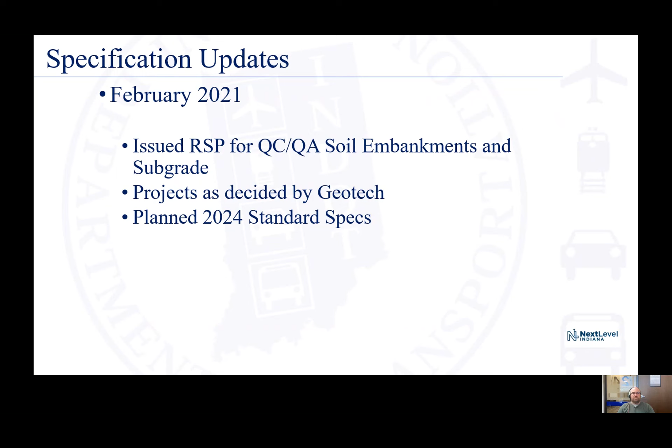In February, this might not be of big interest to a lot of folks watching, but we now have what we call a recurring special provision rather than a unique special provision for our QC/QA soils. That's something we've been working on with our geotech division for the past 10 or 12 years. It's gone very well, and we are rolling that more into our standard specifications.

There's one additional fairly minor update related to slag materials and B-Borrow. B-Borrow made a change to not allow the use of those slag materials if it's being used within 2 feet of the free water level, due to concerns with leaching.

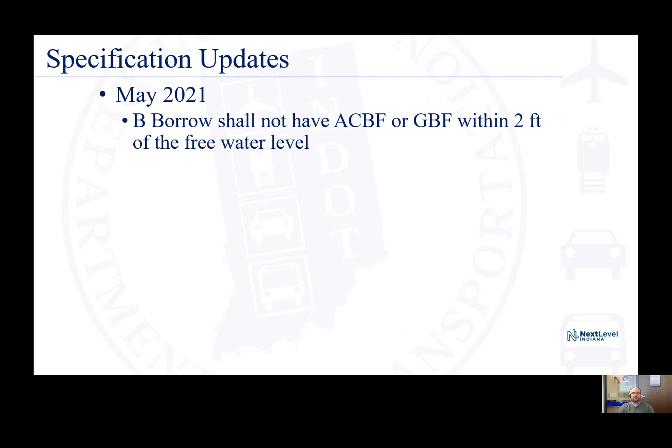So those were a few, I'd say, fairly minor changes that were made. But one of the biggest things that happened aggregate-spec-related over the past year was actually a change that happened and then unhappened. That's related to the tarantula curve.

If you've seen me talk over the past couple of years, you've probably heard me talk about optimized concrete aggregate, aka the tarantula curve. For those who don't know, it's called tarantula because the graph looks like a spider.

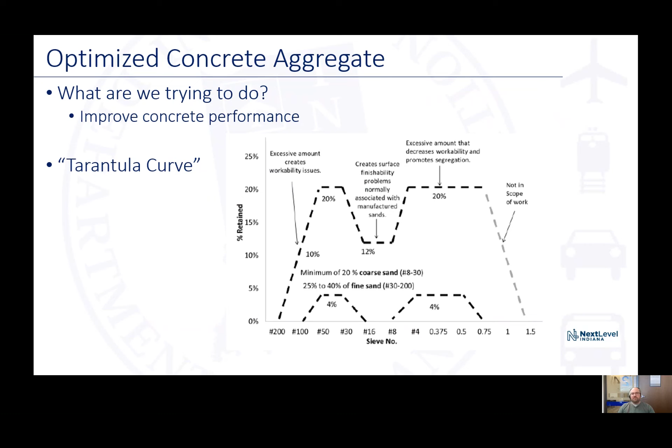The key to notice here: the idea is you have a concrete gradation for a proposed mix, and you plot it within this curve. If it's within the curve, it's considered optimized. The key to note, though, is it's in percent retained, on each individual sieve. So there's a couple differences we have to wrap our heads around—we're used to looking at percent passing or cumulative percent passing. So when we're talking about tarantula, we're talking about percent retained.

INDOT has been talking about this with industry for at least the last 6 or 7 years, and probably the last 4 or 5 fairly seriously, on how to get this optimized. The concept is very similar to what's been done in asphalt for many years with the concept of VMA—it's all about packing aggregates.

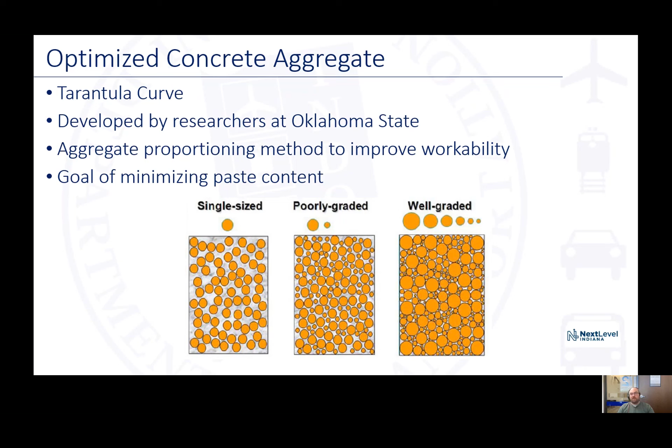You can see here on the screen, if you have single-size, poorly graded versus well-graded aggregate, the idea is to minimize the space between those orange aggregates. With a single-size aggregate, you have a lot of space in between that requires more paste, more cement in the case of concrete. There are ways to improve that packing by looking at the gradation, and it has a lot of benefits—not just reducing paste content, but also improving workability and durability.

This is a real-world example, a core taken from one of our interstates that was not optimized. You can see on the screen where that particular mix came out on the tarantula curve—it was not optimized. The intermediate size had too much percent retained, and that's actually what happened. This wasn't the only core this happened to. The surface didn't close behind the paver, poor consolidation led to segregation, and now we're left with material that has voids going down throughout the pavement due to workability—it's going to end up being a long-term durability issue.

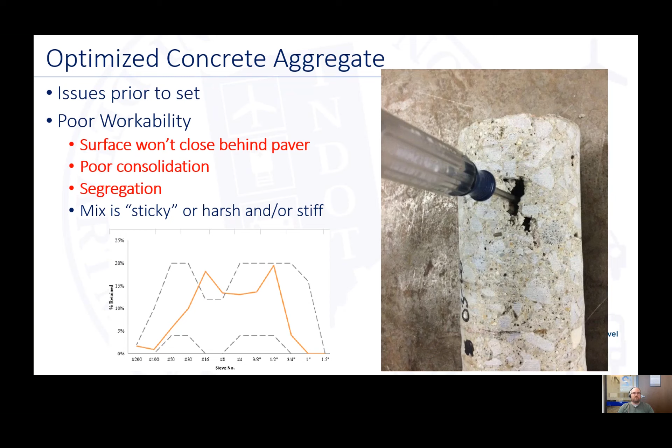So all that being said, there are benefits to optimization—it can avoid situations like on the last screen, among others. It hasn't been as simple as just flipping a switch and changing the spec, though. In conjunction with the aggregate industry, working with IMAA and the concrete industries, a lot of discussion ensued as to the best way to implement this.

Would we change the aggregate gradations that are in the spec, or change the requirements for a concrete plant to meet? We ultimately came to a kind of middle ground proposal that would allow aggregate producers to submit a gradation for approval that could be used in concrete.

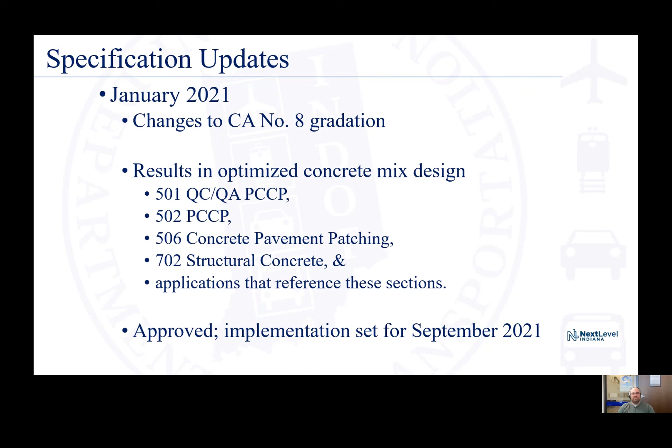So in January '21, we made a change to the spec to require optimized concrete mix design in all concrete applications, referenced in 501, 502, 506, 702, and anything else that cites those. It was intended to be implemented September of '21. You've heard me talking a lot about 'supposed to' and 'intended to,' and probably giving away the answer here, but the short answer is it didn't happen as planned.

So what happened? Along the way, there was a lot of discussion over whether we need a different gradation of eights for our coarse aggregate in concrete. Is this going to be for all concrete? Is it going to apply to non-INDOT concrete? A lot of the concrete industry folks indicated they would prefer to use one coarse aggregate for all their work, whether it's INDOT, private, or commercial, and that was one of the goals.

Over the course of spring and summer 2021, the concrete industry said, on second thought, we're still going to ask producers to make standard eights for our private work. That potentially ended up with situations of having multiple piles of aggregate, which was not ideal. There was also a cost increase we knew about, a potential cost increase to the optimized aggregate being proposed.

One of the other deal breakers was pumping. One of the ways we opened up the procedure to allow more optimized aggregate was a larger than 1 inch top size, which eights did not allow before. So when some of those gradations were submitted, there was quite a bit of plus-1-inch material included, and the pumping contractors said, wait a minute, this is really going to decrease the efficiency of their pumping operation. With all that being said, we felt the best thing to do was roll it back.

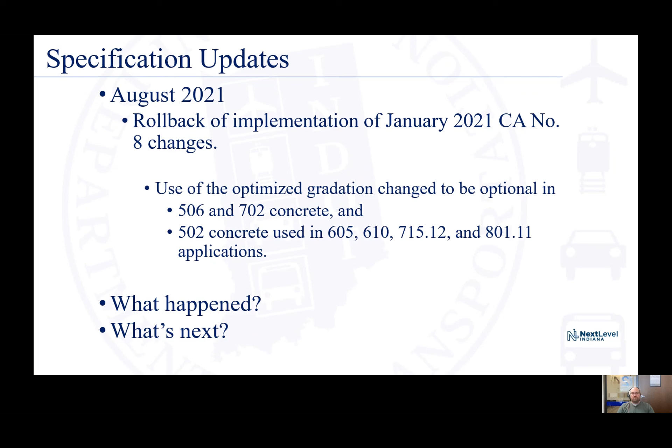So now it's optional to use an optimized gradation per the tarantula curve in 506, 702 — essentially a lot of things produced by a ready mix plant, miscellaneous concrete, structural concrete, etc. It's also optional for 502. It's still required for 501 mainline concrete paving. Honestly, a lot of those contractors have already taken advantage of using an optimized gradation anyway, and they're okay with the larger top size material. So right now it's optional, and that's what we're going to move forward with.

The change we made was actually in ITM 226, which I haven't talked about yet, but that's defined by the new spec, and it's where the coarse aggregate requirements for concrete are now included. As I mentioned, 501 still requires an optimized gradation, and for the other specs you could choose to be optimized voluntarily, or use the standard INDOT 8, or we added an option here for AASHTO or ASTM number 57.

Many years ago — it's interesting to go back into history — we allowed AASHTO 57s in the spec up until sometime in the late '70s or early '80s. We went to the 8, my understanding, to combat cracking at the time. But some of those gradations, 8s and 57s, have a bit of crossover there. This might be beneficial to those of you near our border states who may have had to maintain two different gradations. We're now allowing this as an option.

Moving forward with Tarantula, we're still interested in getting it into the spec as much as we can. Right now, we're going to learn by seeing how many concrete mixes come in using it voluntarily, whether through a different coarse aggregate gradation or blended with an intermediate aggregate like pea gravel. So this year, 2022, we're going to monitor and reset in the fall moving forward, and see what we can do to continue and get as many mixes as we can optimized in Indiana.

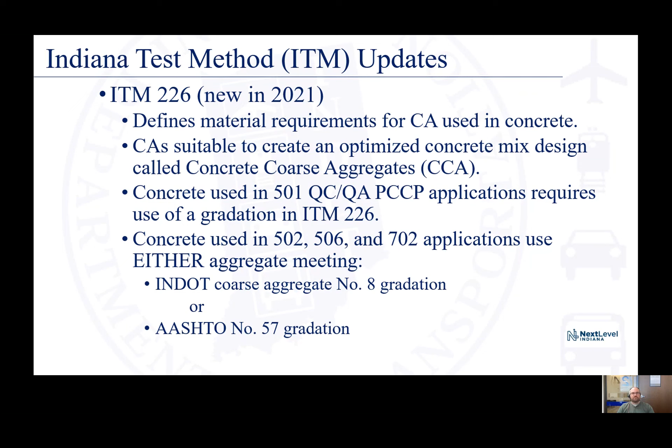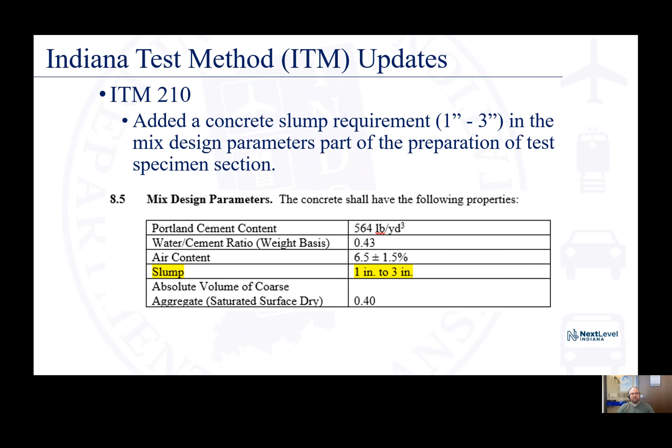ITM 211, the CAPP program, inactive status - we added some clarification and clarified some language. Previously, a producer had to request inactive status. We added a statement that if for 3 years a producer has not produced or shipped any material, the Division of Materials and Tests may notify and place the source in inactive status.

This is just to get some of these cleaned up that haven't shipped anything for years and move them to inactive. Of course, they can always request to go back active if they start producing again.

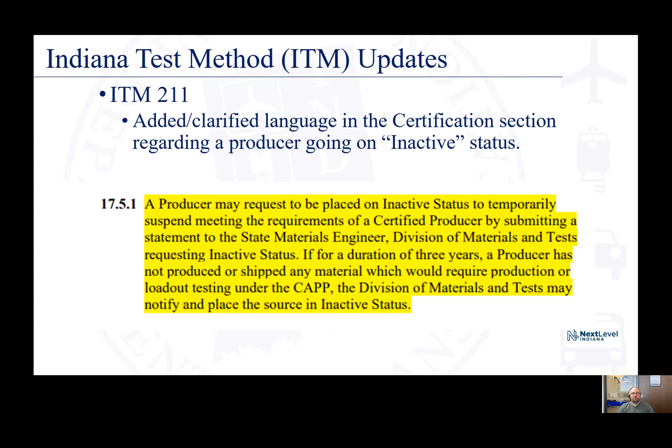All right, ITM 224, which is flakiness index. We did add a couple of things. Another sieve was added that was not referenced - it was referenced in the ASTM E11. It's different than the number 4 sieve - they're very similar, but different. So we added that. And probably the bigger change is having 2 specimens rather than 1.

The concern was we had to do a gradation, run the test, and then do another gradation - and if we have an aggregate that's prone to degradation, that could skew the results. So the idea is we reduce 2 samples, do a gradation on one of them, and on the second one, don't do the gradation first - run the test, then do the gradation. It's intended so each one only has the gradation done once rather than twice. We also added some revisions to the worksheet for clarity.

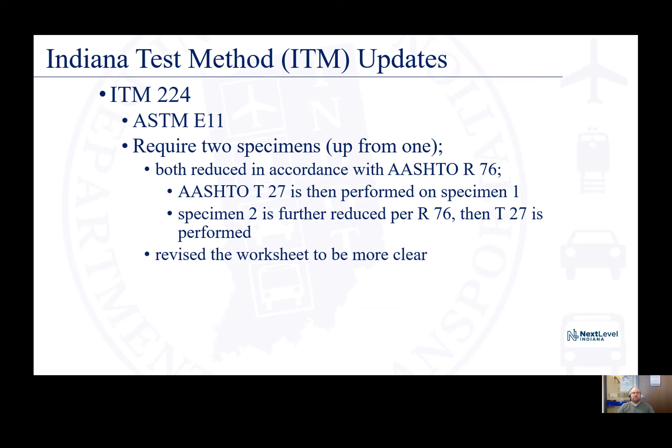ITM 902 - this is one of those examples I like to tell people, if you see something that looks confusing or not right, please let us know. We try our best to review everything we put out, but we don't always catch everything. Sometimes an edit makes sense to us but doesn't make sense to someone who wasn't in the room when we discussed it. This is one of those cases. A couple of years ago, we made some edits to the appendix in ITM 902.

ITM 902 is verifying sieves, and we updated the workbook. It was pointed out to us last fall that there was some confusion - we had 2 different things labeled X and Y. Where you now see 1s and 2s, we had those as X's and Y's, and we also need to make the measurement X and Y of each sieve opening.

So we changed that - now we have field 1, which is sieve openings 1, 2, 3, 4, 5, and field 2, which is 5 additional sieve openings going the other way. Each one of those has an X and Y dimension, and that's what we really want to measure, which needs to get recorded in that table.

We added some more clarity in the language there - we need to average the X, average the Y, and added some language pulled down from the actual ITM about whether the sieve will pass or fail. So really all just for clarity, but it was a user who noticed this and said, hey, this doesn't make sense to me - and they were right.

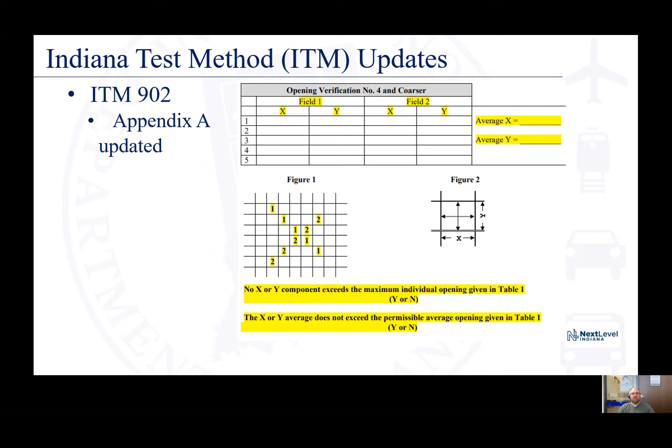Okay, some additional future topics. One of them is modified coarse aggregate number 53, and this was a submission that came in from the IMAA a couple of years ago now. I have to admit this one got eaten by COVID just a bit.

I'm sure a lot of things that got sent around the beginning of everything that's happened the past couple of years kind of went by the wayside, and I had to get caught back up on it. So a couple of years ago, IMAA submitted the idea to split the current gradation into two. This is the current gradation for our number 53s.

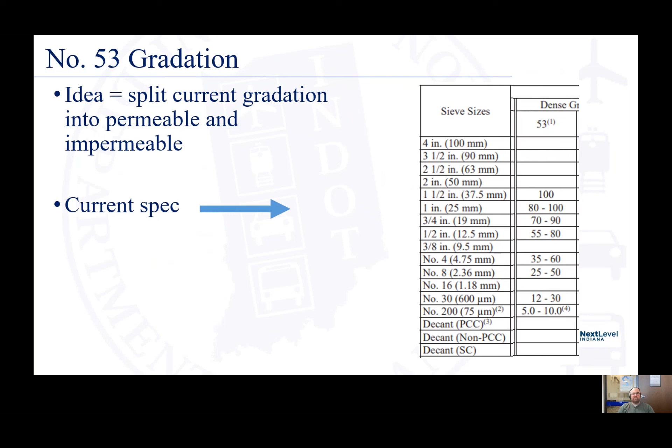You can see there on the right of your screen, straight from the spec book. What was submitted as an idea was this type 1 and type 2, so two different issues. I'm glad when folks bring things up that I wasn't aware of. A lot of producers, especially stone producers making 53s, have to blend some cleaner material, natural sand or whatever, to meet the 5 to 10 gradation requirement on the number 200 sieve. That's part one. Part two, separately, I was in a discussion with some prime contractors talking about 53's compaction, and they said it would be a lot easier to get the compaction if we had just a little more fines, a little higher than that 10%. And it's like, well, hey, when a good idea comes together.

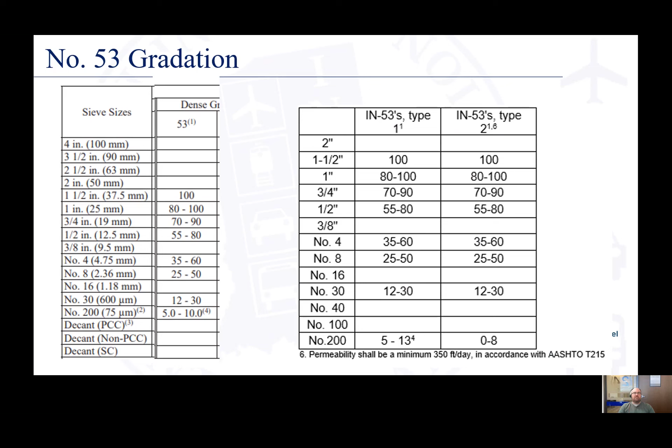So we took a little time, our geotech and pavement group reviewed it, and don't really see any issues with having the slightly higher fines of the proposal, 5 to 13%. So on paper we're looking at moving forward. The other type, 53's type 2, is proposed for drainage type material. So having two - one for impermeables, kind of when stability is needed, and one for having a drainage layer. Right now what we're looking at is better defined material usage, easier to produce, and better constructability in the field.

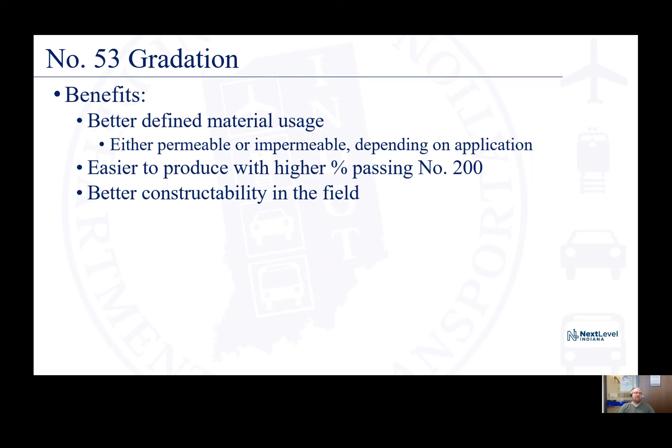I got ahead of myself there from that slide, but what do we do now? We've confirmed it's valid on paper, and we're looking for some volunteers to pilot it. We already have one volunteer, and we're going to work with them coming soon to place some of this on a job. That's really what we're looking for this upcoming year - some folks that would like to produce that gradation with slightly higher fines, coordinate with an existing project, and really just see if there's anything we've missed in the field. As of right now, it looks like it's probably a win-win for everybody. If everything goes well, with a couple of pilots that we're able to try, I could see moving fairly quickly getting these changes into the standard specs.

It was pointed out to me at one of the meetings, in person after the meeting, that what's old is new again - apparently the gradation that's been proposed is something very similar to the gradation we used to use back in the 70s, or maybe even the 80s. So sometimes things come around, good ideas come back around again.

All right, PRA materials, where are we? You may have heard me talk recently on PRA, our polish resistant aggregate program. Our current process right now has two parts. Part one is validation on the British polishing machine, which can be time consuming. Then the real time consuming and expensive part is a test strip. So that's how it is now. To get a PRA material approved is at least 2 years, usually about 3 by the time everything is said and done, and it's based on one project.

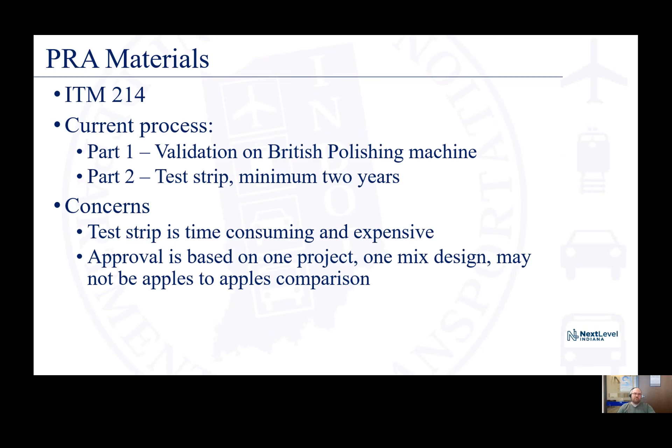From INDOT's perspective, it's a snapshot in time on one project, and it needs to beat an existing PRA that may not always be the best measure of the aggregate's performance for polish resistance. So a couple of concerns about that. I've asked the question, can we use what's used in our ITM 221 approval process, which is the dynamic friction tester you see there. ITM 221 was developed about 8 or 10 years ago now through a research project to approve high friction aggregates, equivalent to steel slag essentially. We have a few of those around the state, but that's not what we're trying to do here. We're trying to take the same concept used in that approval process.

Using this dynamic friction tester and use that to approve polish resistant aggregate. What you see here is called a 3-wheel polishing machine. On the left, we make up some asphalt samples, put them on a mold, and use plaster of Paris to level it out so we can measure. What you see on the right is a diagram of the 3-wheel polishing machine. The wheels go around and around 300,000 times, polishing a track in there, and afterwards you can see it.

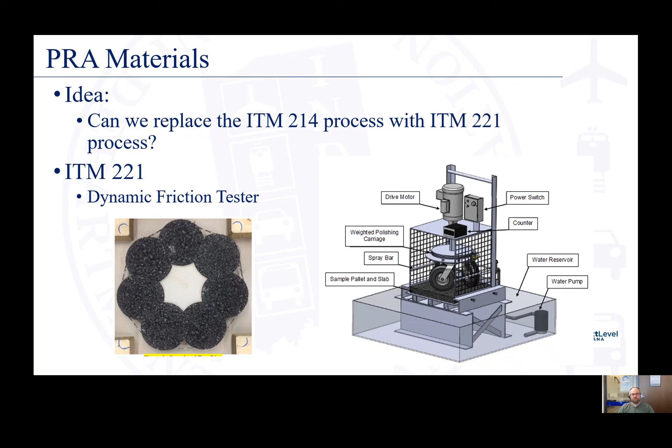So what are the issues? We think this can tell us some good things about friction resistance, but what's our confidence? Can the test discern between good and poor aggregates? When we did this initially and did a lot of the research using this equipment, we typically only tested aggregates that we think are going to perform well. So we need to test some that we think are going to perform poorly to make sure it can really differentiate between those. What mix design should be used?

Currently, a cookbook mix design is being used, and then who's going to make and test the samples. Currently, the equipment here in Indiana is operated by the North Central Superpave Center and IESA.

INDOT Materials and Tests is looking into getting some of the equipment. We don't have it yet, but as of right now, there is a fee that has to be paid to IESA every time the testing is done. So if Materials and Tests gets the equipment, then we could do that in-house without any additional fee. That's something we're looking at doing, but procurement right now, what you're seeing there on the screen is made in Japan and has to be sourced from Japan. It's been fairly difficult, to say the least, I think, to get some of that stuff right now.

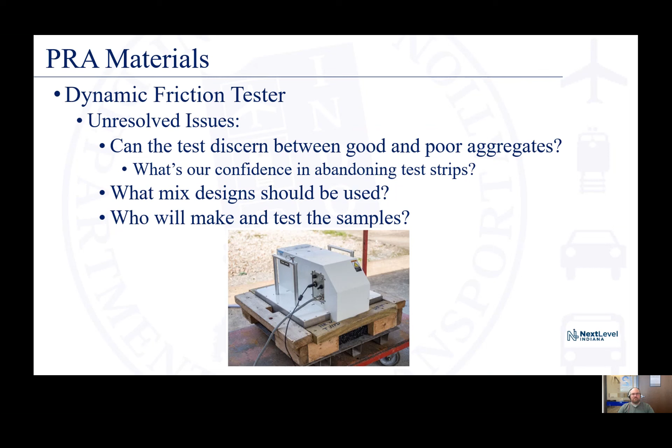One additional thing we're reviewing with ITM 210, especially with some of the changes I believe to the 53s I was just showing you. When we're doing AP testing, we're going to sample whatever specific gradation, product I should say, that you're wanting to get approved for AP. But when we actually make the beams, we have a standard gradation. So for those who don't know, it is a specified gradation that's in ITM 210 that's unrelated to the gradation of the product you're making.

The issue with that is we're having a hard time with the number of bags we normally get, having enough material, so we're having to get more bags. We're currently reviewing a different gradation that Illinois uses to see if that would relieve some of our issues with that. That's ongoing. Don't really have anything else to report on that right now.

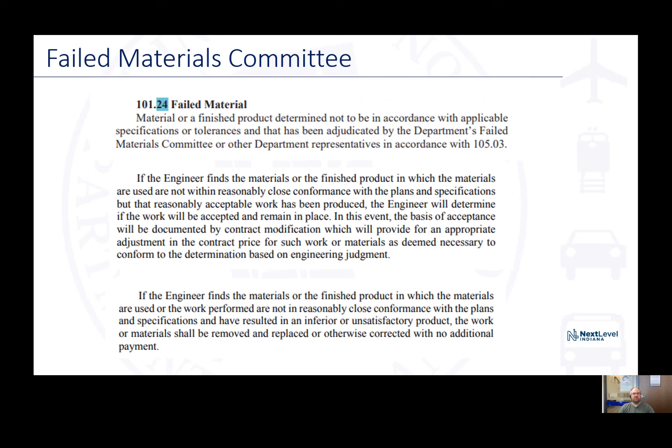And so a little bit of the history of it. Many years ago, prior to 2010, and many years before that, the chairman was the chief engineer, and then there were 3 members. The members changed over the years, but regular monthly meetings continued on, were held.

And then around 2010, for efficiency, the committee moved away from having regular monthly in-person meetings where all of these folks had to attend. So committee business was handled via email. If there was a failure that came in, we'd just talk about it via email, maybe a phone call, and emails and letters would fly. It was much more efficient, but collaboration was muted. We didn't have as robust of internal collaboration with INDOT, appeal hearings, that sort of thing.

And so a few years ago, we started talking about it, and finally 2 years ago, we decided to reform the committee, resume monthly meetings, and get back to collaborating internally again.

So we changed up the membership that had existed at the time, and I like to tell everybody, to be a member of Failed Materials Committee, your first name has to begin with J. So if any of you are aspiring out there to ever be a member, well, I hope your name starts with J. But in all seriousness, we wanted to add more broad representation from within INDOT.

We did not typically have someone from asset management or from design involved. It was typically more materials and construction. So now we have representation from each of those groups.

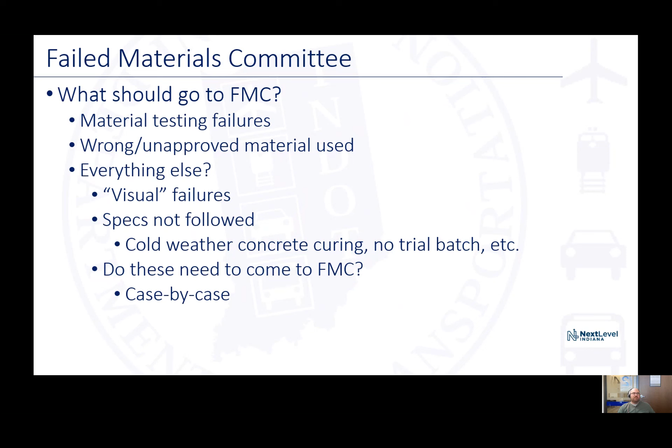So these need to come to FMC. What I've been telling everyone is maybe yes, maybe no, case by case. If something can get handled in the district between the contractor and maybe the supplier, if necessary, and INDOT, that's perfectly fine. You don't want to slow down the process with unneeded bureaucracy. But if there's something FMC can do, or more investigation needed, or a decision made via consensus, then that's something that can come to FMC.

In the case of our research division, they have tools that can be sent out, whether it's the van, FWD, whatever it is. We can gather more information about the condition of that road or the bridge as it is right now. There is a pink sheet generated, and we call it a pink sheet because years ago it was pink. We have green sheets and other things too that were that way, but it's not anymore. But it's called a TD305. But that is the information gathering tool that we use internally to gather information about the failure that's sent to Dave.

Dave generates a case number, a unique case number. This helps us keep - this was a new thing this last year. Helps us keep things straight. So if you see correspondence and it says case number 417, it's just an internal number that we have to make sure we're talking about the same failed material issue.

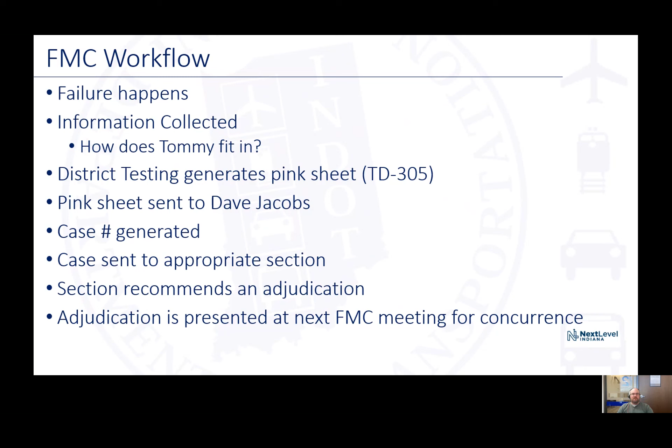A case is sent to an appropriate section, and by that I mean our asphalt section, aggregate section, concrete section, etc. And a decision is recommended, and then at the next meeting is presented to the FMC for concurrence. And once that happens, if there's concurrence, we send a letter out to the prime contractor, as well as a lot of folks at INDOT, area engineer, et cetera. And the contractor has 15 days to appeal the decision.

So any contractor that appeals has the right to a hearing. We give 30 minutes. We're still doing the meetings virtually. We found it to be efficient for all involved, both INDOT and industry members. So all contractors have a right to a 30-minute appeal hearing.

The chief engineer, Greg Pankow, and FMC will discuss after the appeal hearing and make a final decision, which is - Greg Pankow's involved because the final letters are signed by him at that point, and then the final decision is sent out. So I do want to mention that 30 minutes, if there is more information presented or more investigation needed, we do allow additional meetings, but that's kind of the standard main initial meeting. If no other information is presented, then that's what it is.

But I have been asked, is that the only meeting? Well, no. Not if the contractor supplier comes and has additional information we need to look into, then we can do another meeting past that.

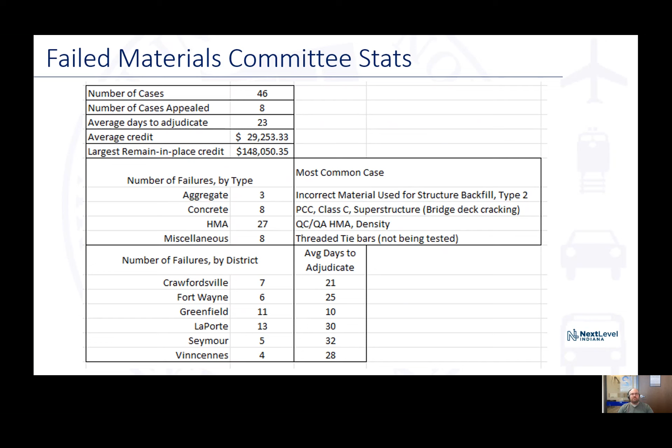You can see the most common cases there. I mentioned earlier about aggregate - probably the most common was incorrect material use for structure backfill.

So, some areas for improvement: we're still trying to improve district participation, district construction specifically. There was at least one failure last year where the contractor brought some things to light on the appeal call that made sense, and it could have benefited from district construction being on the call. So we're trying to get as much information and encourage them to participate.

All the district construction directors are now invited to the meetings, a standing invite, so they can sit in on all the meetings if they like. Specifically, on each job, we like to invite the project engineer and the area engineer on the INDOT side to help provide information and support if claims are made, or just to make sure that everyone is represented and the failure is being represented well.

One other thing we found the past year is those pink sheets I mentioned. They're not standard statewide - different districts had different versions. So we're going to work on standardizing those forms. That's more of an internal thing.

One thing we have not done historically is have an output - maybe a story of the failure, a story of the asset. When we do a lot of testing at the time of construction, we have knowledge of the material, whether good, bad, or otherwise, a lot of times. But when we pass things off to our asset management bunch, which is tasked with managing the asset for the next 20, 30, 50 years, we don't do a great job of sharing that we had low density over here, for instance, or a different material, and we went ahead and accepted it with a penalty attached, but we expect there might be some reduced life.